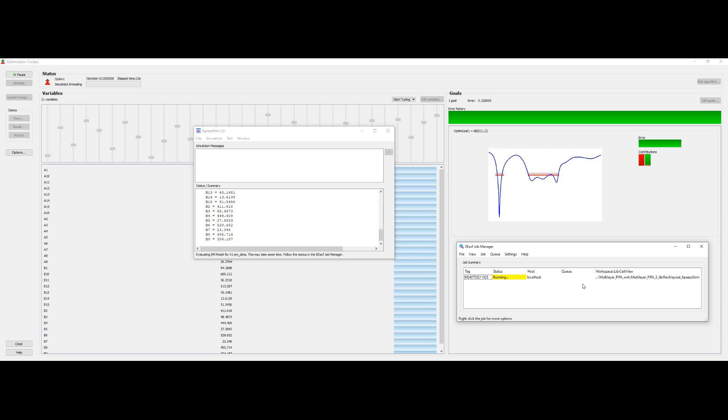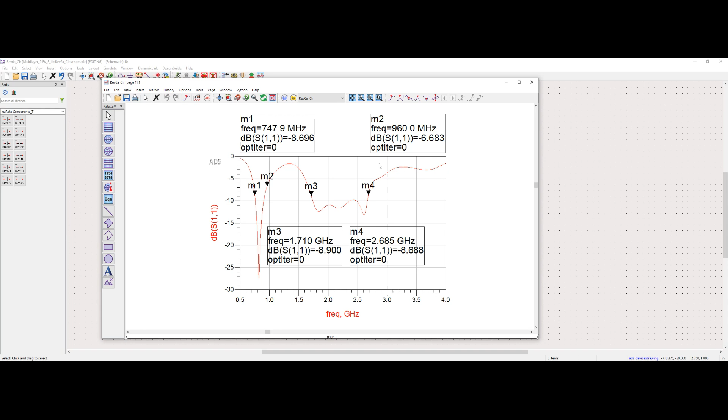In part 17 of this tutorial series, we started the optimization. As you can see, the optimization is ongoing. Since I started the optimization last night, the goals have almost been met and the error rate is low. Due to this, I will cancel this optimization so we can look at the results. These are the optimization results. Since we optimized the antenna for a good S11, I have plotted the S11 in the data display window.

Our frequency band of interest is 746 MHz to 960 MHz and 1.71 GHz to 2.69 GHz. As you can see, the markers are not set at the correct frequencies, so I will move them manually. This can be done by selecting the markers and pressing the up or down keys on your keyboard.

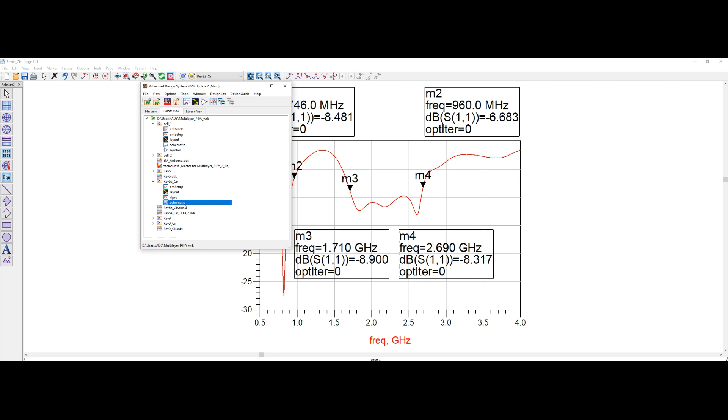The antenna exhibits less than -6 dB return loss across the frequency band of 746 MHz to 960 MHz and 1.71 GHz to 2.69 GHz, which indicates the antenna meets the specifications. I believe further optimization and tweaking will improve these results. In order to simulate the far field parameters such as gain, directivity and radiation efficiency, we need to do an EM simulation with the save fields option enabled.

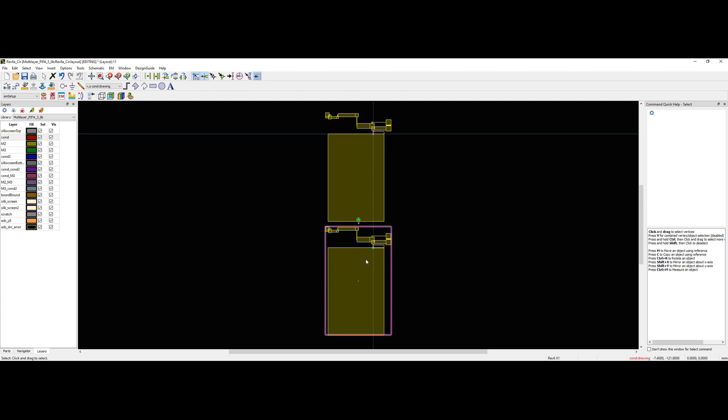To do an EM simulation, we need to generate a layout from the schematic, because it has the optimized antenna parameters. Generate the equivalent layout to the optimized schematic by clicking Layout, Generate or Update Layout. When you click Apply, the layout will appear. The layout needs to be flattened so the pins can be placed within. Pins are needed to create a port for the simulation.

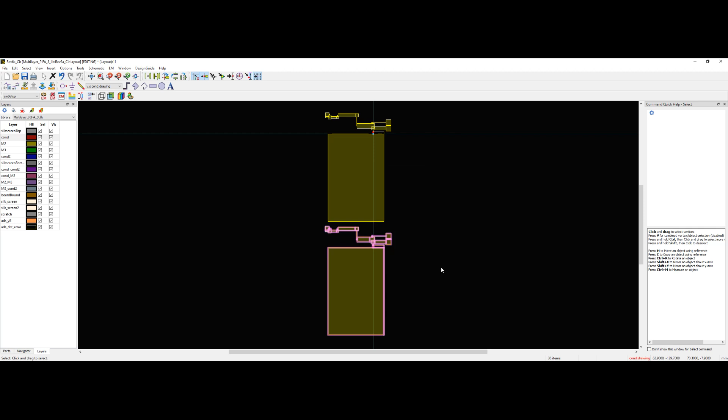To flatten the layout, right-click on the layout, go to Component and select Flatten. A pop-up menu will appear with options. Flatten all levels of hierarchy to shapes is the right option for this design, so we click Apply and OK. Since I already have a flattened layout with the pins placed, I will delete the newly flattened layout. Let's take a closer look at the pins placed on the layout. You can place the pins by clicking Insert Pin. Here is the port setup in the port editor.

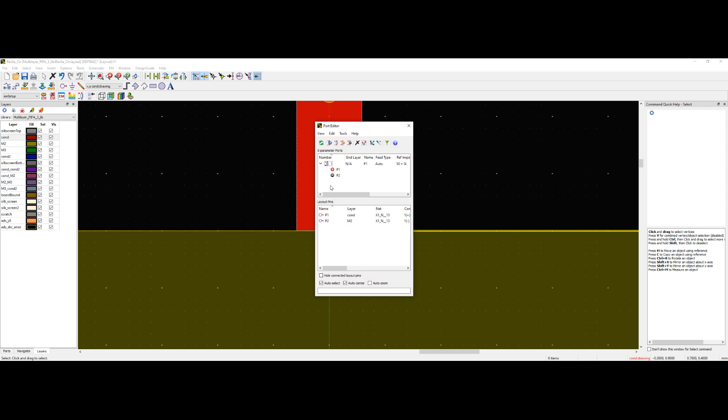The next thing to do is to set up the EM setup. The EM simulator is set to FEM. The frequency range and frequency points are set to our preferred frequencies. The most important thing is that under the output plan, we need to enable save fields by selecting all the generated frequencies or user-defined frequencies. I choose all the generated frequencies. The rest of the settings can be default for now. All the settings have been set before, and that's why you are seeing a fully done EM setup.

The simulation is executed by clicking Simulate, which is located in the EM setup under the model. Since we are doing EM simulation for 6 frequency points together with the frequency range and also have the Save Fields option enabled for all the frequencies, this process will take time. Due to this, I will fast forward this process.

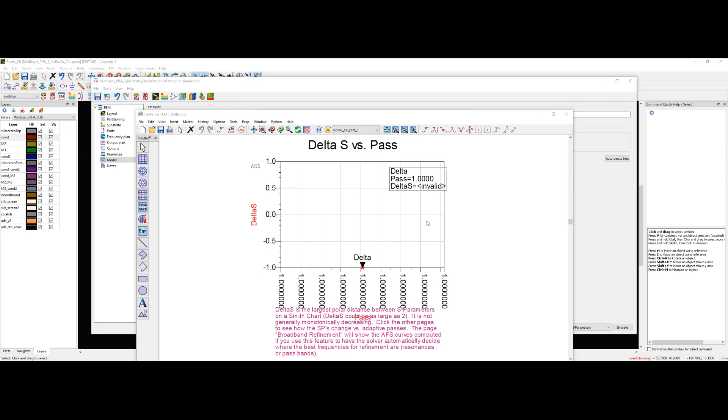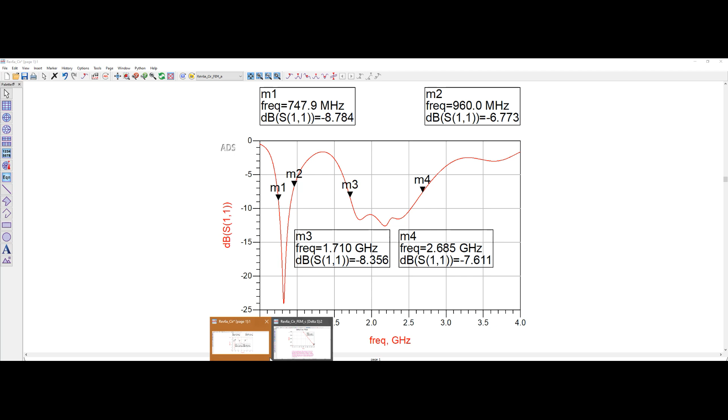Here are the return loss results again. This time, this is from the layout EM simulation. We also got return loss results after optimization. As you can guess, both are similar. The return loss meets the specification for the frequency band of 746 MHz to 960 MHz and 1.71 GHz to 2.69 GHz. Next, let's look at the far field parameters. To get them, click on the Far Field button as demonstrated.

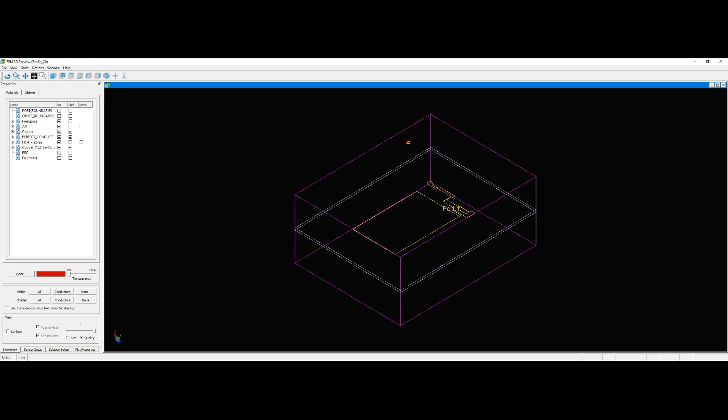The far field simulation is in progress now. Finally, the far field simulation is completed and the 3D radiation pattern and antenna 3D view are launched with the far field results. In the solution setup, you can choose the frequency of interest. After that, click Far Field and Antenna Parameters to display all the far field parameters such as gain, directivity and radiation efficiency for that particular frequency.

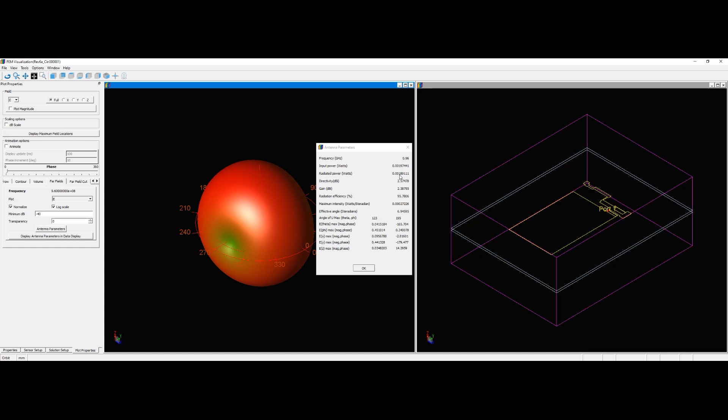At 746 MHz, the directivity, gain and radiation efficiency are 2.2 dBi, 1.9 dBi and 94% respectively. After that, let's move on to the 960 MHz frequency point. The directivity, gain and efficiency are 2.5 dBi, 2.3 dBi and 95% respectively. The next frequency point is 1.71 GHz. As I change the frequency, you will notice that the far field radiation also changes.

The directivity, gain and efficiency are 5.3 dBi, 5.1 dBi and 94% respectively for 1.71 GHz. At 1.99 GHz, the directivity, gain and radiation efficiency are 6 dBi, 5.8 dBi and 95% respectively. At 2.11 GHz, the directivity, gain and radiation efficiency are 6.2 dBi, 6 dBi and 94% respectively.

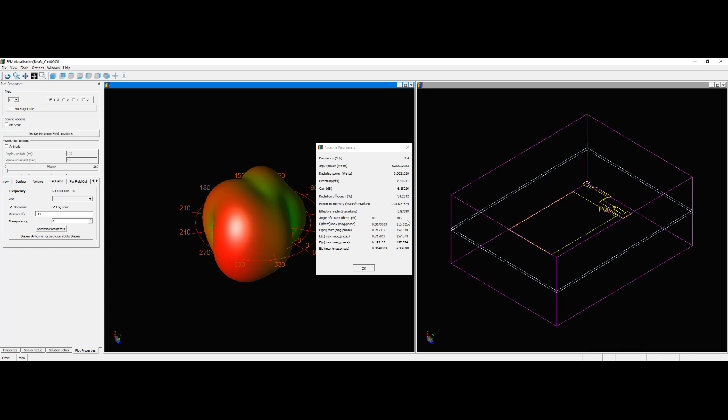At 2.4 GHz, the directivity, gain and radiation efficiency are 6.4 dBi, 6.1 dBi and 94% respectively. Finally, at 2.69 GHz, the directivity, gain and radiation efficiency are 7.71 dBi, 7.2 dBi and 90% respectively. Last but not least, you can also rotate the antenna's 3D view and radiation pattern. This is the end of the design and optimization of a 4G and 5G antenna tutorial series.